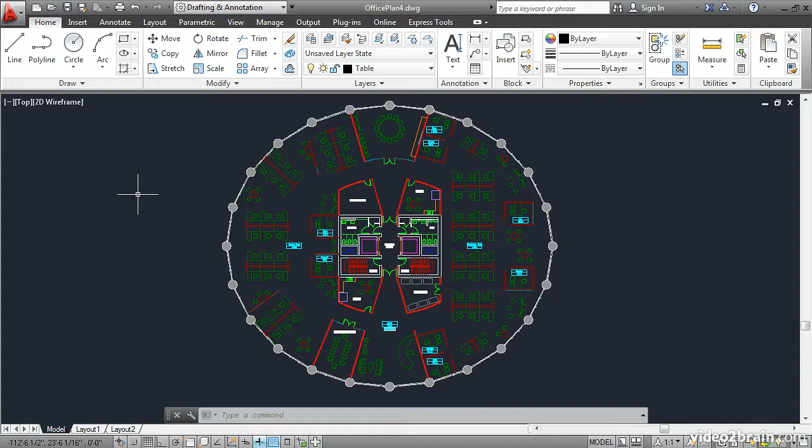Open the Office Plan 4 project file, and then click the Layout 1 tab. Layouts are representations of physical sheets. This layout has a viewport displaying the contents of the Model tab, also known as Model Space—namely, it's the drawing itself. The layout also contains a title block. You'll be creating a table and placing it in this blank area on the layout.

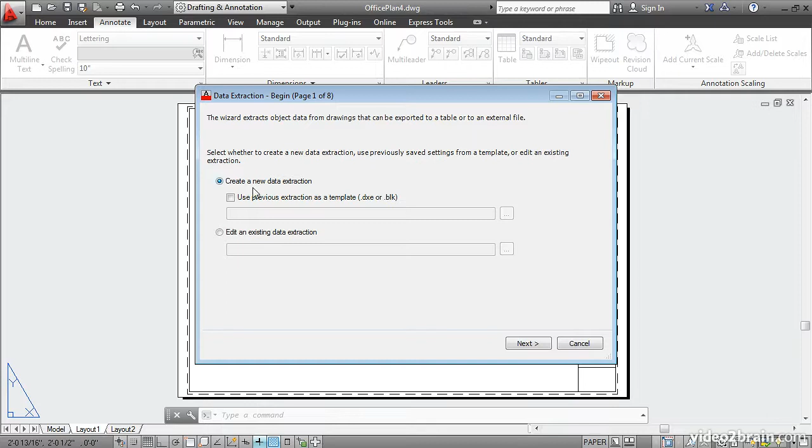Click the Annotate tab on the ribbon, and in the Tables panel, click this tool, Extract Data. This launches a wizard interface which takes you step by step through the process. Let's create a new data extraction and click Next.

You're prompted to save a file. In this case, we're going to be extracting data from the room tags, so let's just use the name room tags as the file name here. It will save it with the extension .dxe. We'll take the default option here to use the drawing itself as the data source. Click Next.

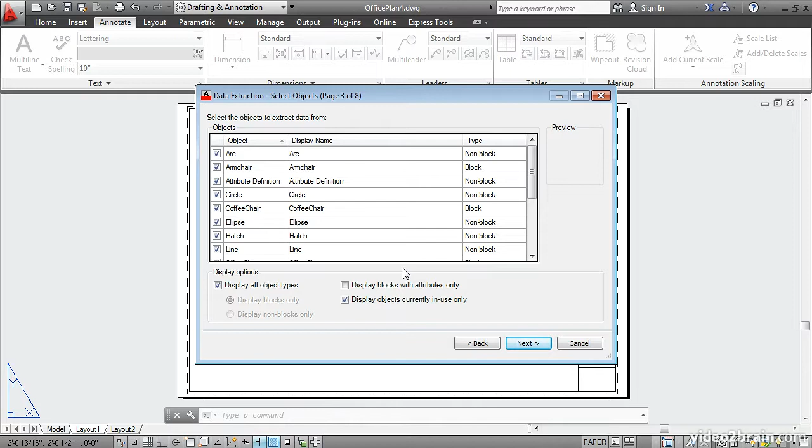You're presented with a list of objects which you could potentially extract data from. Right-click on any one of them and say Uncheck All. Scroll down and select Room Tag. Then click Next.

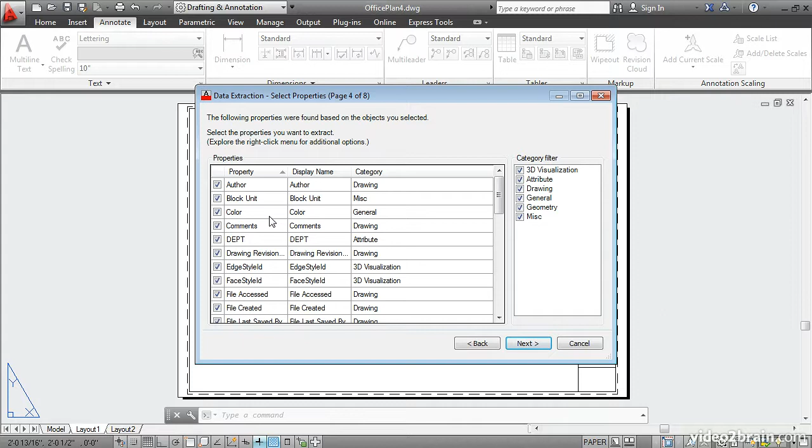Here's a list of all of the properties that could be extracted from the room tag. We're just interested in its attribute values, so deselect all these categories except for attribute. Click Next.

This is a preview image of the actual table that will be created. We don't need to have a count and name column, so let's uncheck these here and here. You can also sort the table by clicking on the headers. Here I can sort the department list in reverse alphabetical order, or I could sort the room number in forward order—just click the header again to sort in reverse order. I think in this case I will click the department header again to sort in alphabetical order.

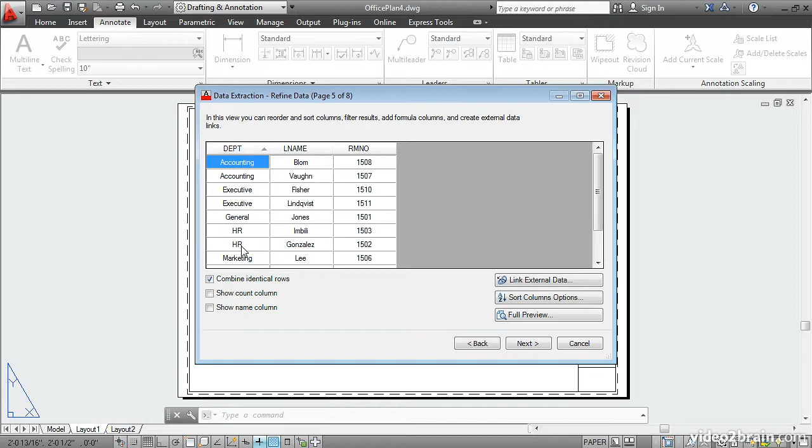Click Next. And then here we need to insert the data extraction table directly into the drawing by selecting this option. Note that you also have an option to output the data to an external file which could be used in another program. Click Next.

And here we'll accept the standard table style, so click Next. And finally click Finish.

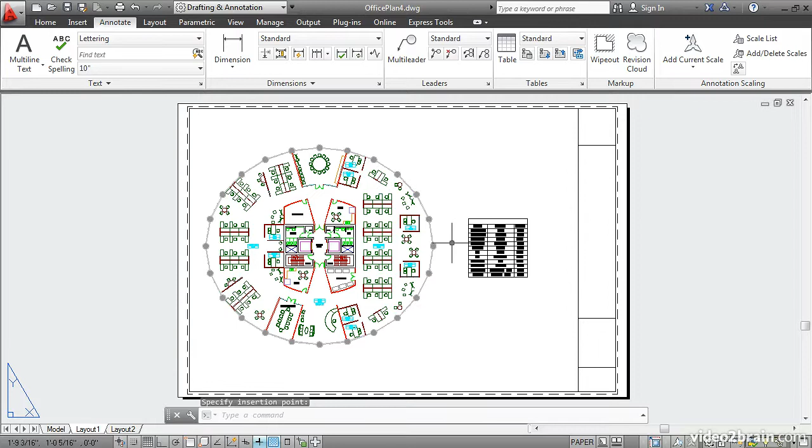There's a representation of the size of the table here attached to the cursor, and the last thing we need to do is just click a point to insert that table. Zoom in, and you'll see the table is populated with attribute values that came from the drawing. It even includes the invisible attributes, which list the department.

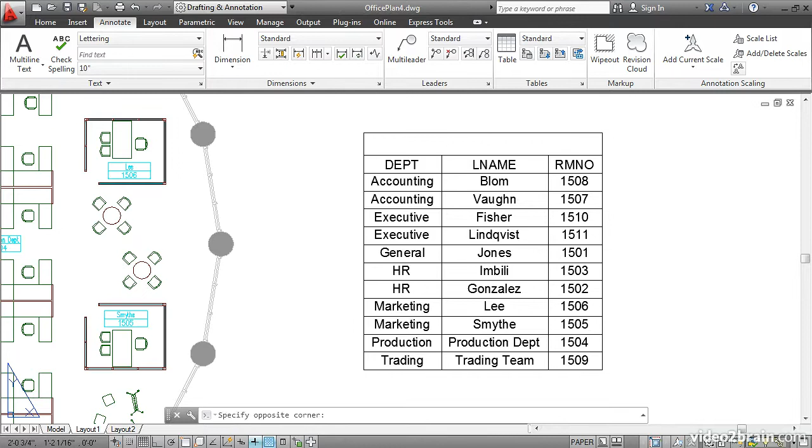We need to edit the table and add some text for a title, and we'll also change these header names, which right now are displaying the attribute tag names. Double-click in this cell and type Room Schedule.

Press Enter, and then double-click on the department cell. Notice there's a lock symbol next to the cursor. We need to unlock these cells before we can edit them. Hold down the Shift key and click on this cell so that you select all three header cells. Right-click and choose Locking, Unlocked.

Then double-click on DEPT, highlight that text by dragging over it, and type the full word, Department, and press Enter. Double-click on LNAME, highlight that, and change that to Employee. Finally, over here, highlight this text and call it Room.

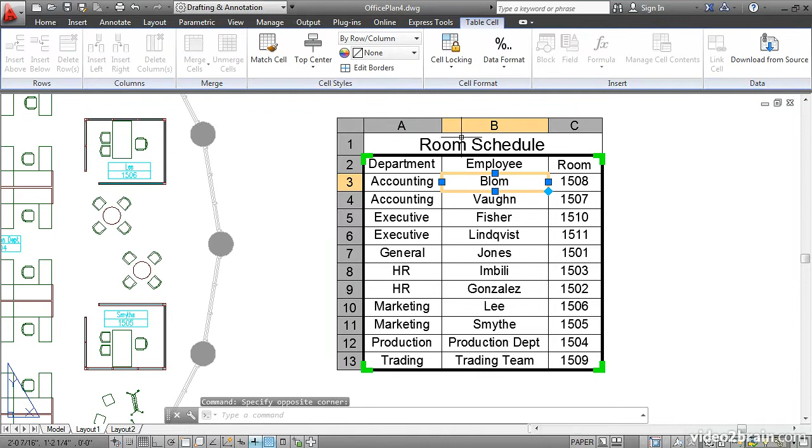You can also change the alignment of the cells. Click inside a cell, and then click on its header, in this case B, to select all of the cells in that column. Hold down Shift and click the A column as well. Then up here on the Cell Styles panel, open the Alignment flyout and select Middle Left. Click outside the table to finish editing it.

So you've learned how to extract attribute data and how to automatically create a table displaying this information. You also learned how to edit table cells and change their alignment.